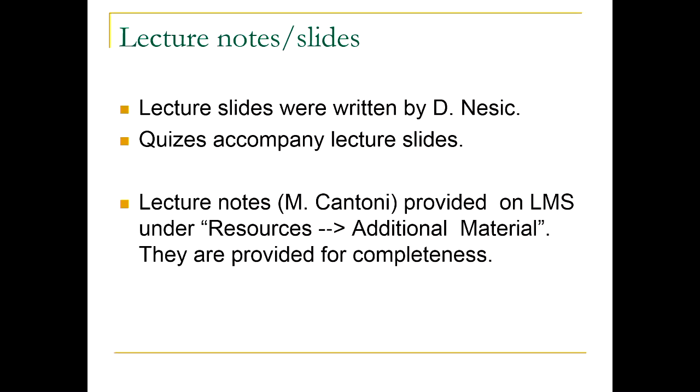Often students say we didn't get enough feedback. Well, I spent 1 semester generating these questions to help you get feedback straight away on how you understand the lecture material. There are also lecture notes which basically cover the same material. They may have a bit more detail at times, and they're provided for completeness. But as I said, I'm following the lecture slides that I generated.

I will teach you about disturbances and perturbations. So this was a disturbance in my lecture, and I handled it well. I'm robust.

All right, so there are other texts. Franklin's book and Ogata's book are classics. And why I emphasize these books is because they have a lot of solved examples. Students often ask me, can you give us heaps of solved examples? These books have them, and you would have a lot of copies in the library. So Ogata would have a lot of solved questions after each chapter, and then a lot of unsolved questions. So it's a good balance between learning how to solve questions by following solved examples, and then attempting those unsolved questions by yourself.

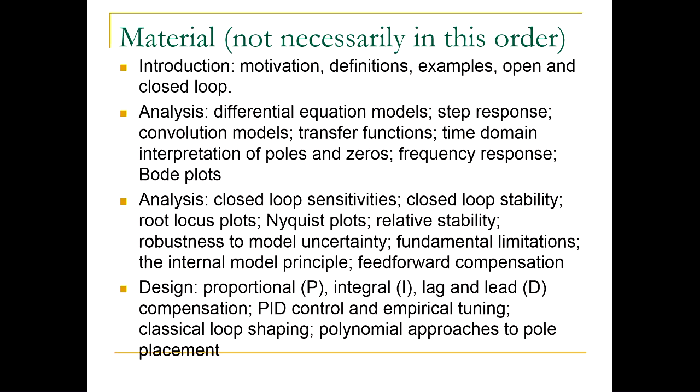Workshops. Workshops are in EDS 8. You can assign yourself, you probably already did, to one of the groups. You would work in groups of 3. There will be some reports for some of the workshops. So first couple of workshops, there are no reports, but then the last 2 do have reports. You would work in groups, and more instructions will be given by the tutors.

All workshops will start in week 3, except for workshops that are on Friday. Why is that? Does anyone know? Yeah, grand final. So footy grand final is on one of the Fridays in September, last week, I think, in September. And these people will start in week 2, so next week. So Friday workshop starts next week. And all others week after that.

Head tutor is Jing Mo. Please contact her for all things to do with workshops. If you need to change times, if you know there are any issues, you're sick, please contact Jing. She would be dealing with these sort of questions. If you contact me, I will just forward your email to her. You can save me just one press of a button by just contacting her directly. And she would contact me for any issues that require perhaps more sort of executive decisions, right? But she's the first point of contact.

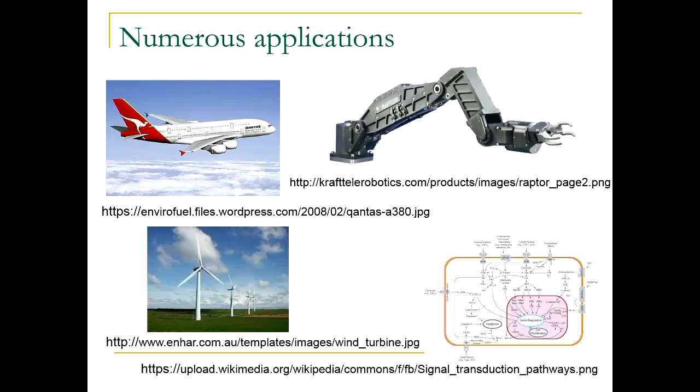So I will present an example with some terminology. One purpose of this subject is to teach you the language of control engineering. Obviously, we want to also equip you with tools, but the language is also important. So I will introduce some of the language in this lecture. And the block diagram is an important part of our dictionary in control engineering, so I will introduce block diagrams, and then wrap up with conclusions.

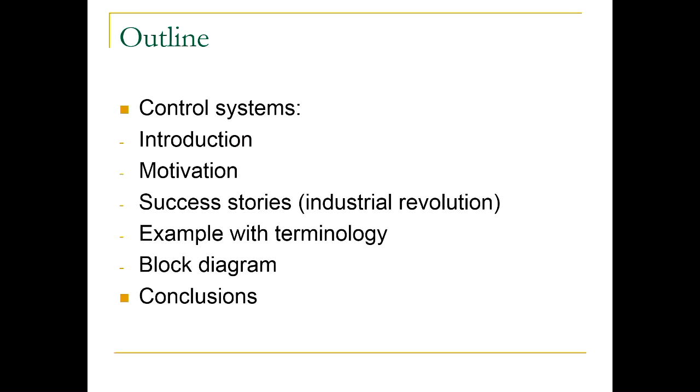All right, so my claim is perhaps that we are a dominant species because we learned to control our environment. And this has been going on much longer than you may think. For instance, I was reading a book about the history of humankind, Sapiens. I don't know whether you've heard about the book. It's a maybe not flattering summary of the effects of humans on nature, starting from the Stone Age.

As people spread, if you believe the theory that they spread from Africa, wherever they came to new lands, big mammals disappeared within 1,000 years. Apparently, in Australia, all megafauna died within a couple of thousand years after human arrival. Eucalyptus forests apparently were not dominant until humans arrived, because they were burning the bush. It was better for them. They get food, they can move around. So they were actually controlling their environment already with the advent of fire.

So fire has multiple uses. You can start eating foods that otherwise you couldn't. Cooking, right? Warmth. You control predators; you defend yourself from predators. Clothes: you can't imagine people conquering the North Pole and Canada without clothes, right? Building cities, etc. We live in a very regulated, controlled society.

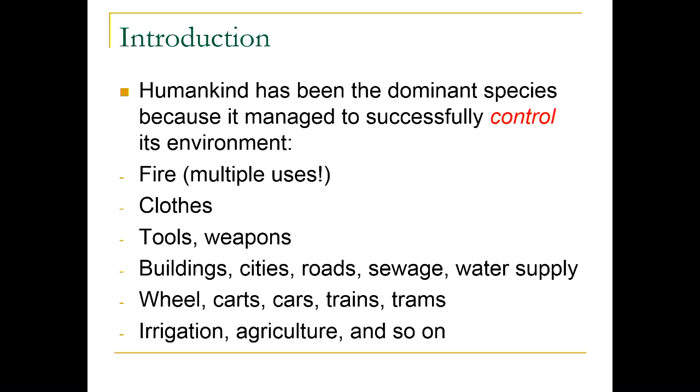And it shouldn't come as a surprise to you that control engineering plays a crucial role in any technological advance. In agriculture, infrastructure of any sort, buildings, household appliances, transport, defense, any device you can think of would have some sort of control in it.

So in order to really talk about control systems, it's a useful thing to reflect on what we mean by a system. You can think of a system as a bunch of things, right, that work together. Actually, anything is a system. We talk about the solar system. Share market is a system, economic system. We talk about social networks.

Control scientists these days analyze interactions on social networks, and they try to maybe look at advertising. What works, what doesn't. But they develop and analyze mathematical models of how humans behave in a network situation. So there are things called consensus. When do people reach consensus, right? In terms of their opinions, etc. So notion of a system is a very broad notion. Pretty much anything, a single cell can be a system, a solar system, galaxy, you know, anything really is a system.

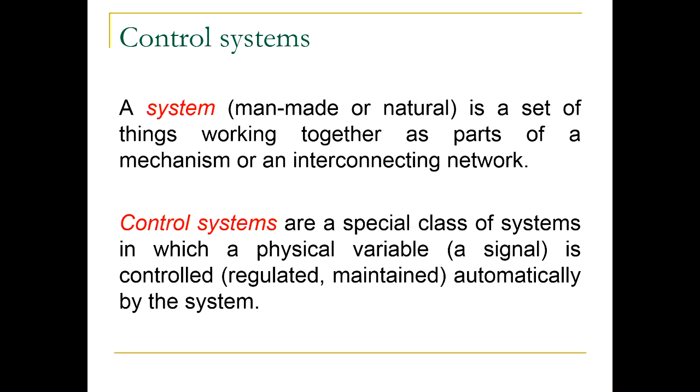Now, control systems are a special class of systems in which we want to control a certain physical variable. What physical variable we're talking about, that depends on the application. It can be motion in a robot or a car. It can be temperature in a room. It can be anything, really. When you are taking a photo, there is a zoom. There's a control mechanism there, right? To adjust the zoom so that you get a clear photo, etc. So we will talk in this subject predominantly about control systems.

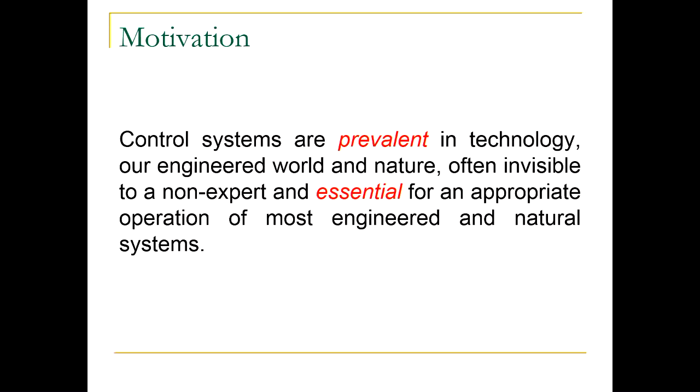Right? So when you get diabetes, that's basically your control system for regulation of blood glucose in your blood, and it's not working. And that's dangerous to your health. Cancer is basically uncontrolled growth of cells. The cells just go crazy and start growing, and we still don't know how to find a stop button, right? That's where all the cancer research is sort of concentrating. So anyway, these control systems are prevalent and essential.

Let's look at prevalence. So I listed here just a small subset of applications of control systems. And you can see here that it pretty much touches upon any area of your life. You might be eating food that was produced in controlled environments. I had for a few years a person who works in mushroom industry, not funny mushrooms, just mushrooms. And this turns out to be a very complicated control system because you want to maintain the right environment for mushrooms to grow. You want to have as good harvest as possible, and that requires careful control of humidity, temperature, etc.

So this is just a subset of possible applications of control. These days, control has found its place in every area of science as well. In medical science, control engineers are looking at basically designing artificial pancreas. So there are sensors attached to your body that measure the blood glucose levels, and there is a device that can pump insulin into your blood, right? Some of them will have also glucose because when the blood sugar falls down, that's a dangerous thing. So some pumps actually have both insulin and glucose. And there is more and more evidence in the research literature that these devices are successful in clinical trials.

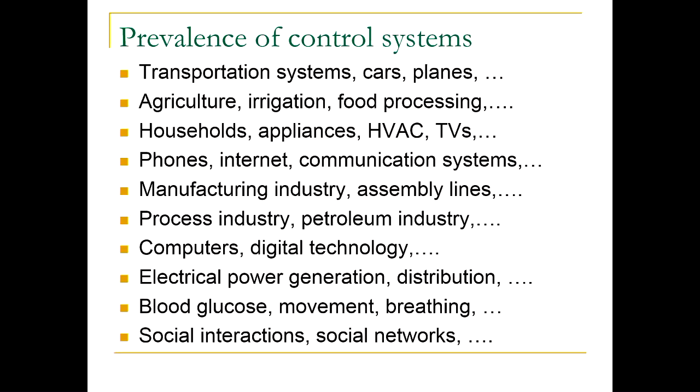So, look, you can find control engineering pretty much everywhere. Unfortunately, many people are unaware of its importance. So I hope at least that you would appreciate it more after doing this subject. Now, that was about prevalence. Prevalence means it's everywhere. How about its importance? Well, I said that it plays an essential role. Actually, I would say this is an enabling technology.

So someone designs a robot, and then a control engineer designs a control algorithm and makes that robot useful for something. Maybe in automotive industry, they are welding, they are painting cars, they're doing all sorts of useful things. But without a control algorithm, robot is absolutely useless, right? There are lots of examples where you can achieve high performance and precision by using control. Precision surgery is one example.

Right? There are lots of repetitive tasks that can be done in a controlled fashion. Assembly lines in the automotive industry have been around for a century, and there was a lot of automatic control that enabled mass production of cars. Control was essential in this case.

Reduce waste and emissions. There are more and more stringent regulations in terms of emissions in transport. So governments impose on car manufacturers certain rules. You can't pollute as much as you want. So that poses a challenge for control engineers to design control algorithms that will achieve these reduced pollutants. Also improved fuel and energy efficiency, especially when you do advanced control.

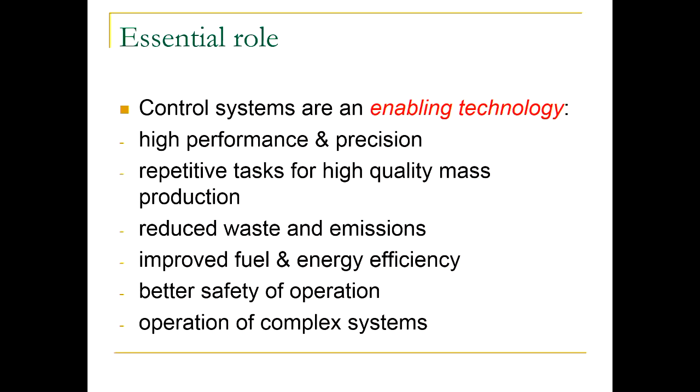By the way, the internet is one of the most complex man-made systems, very complex, and it works. You do get access to the internet. It's not that your next door neighbor only has exclusive access. There is an algorithm behind the internet that provides fair access to the resource. So that's again controlled. The brain is one of the most complicated natural systems, and there are a lot of control mechanisms within the brain that make us think, do, be creative, do all sorts of things.

All right, so I want to go now to a very specific success story. Do you know anything about the Industrial Revolution? Have you learned about it in school? Sometimes called the first Industrial Revolution. Does anyone know what it was? Why do we call it the Industrial Revolution? Because it changed the way our industries work. We had a lot of small, medium enterprises, but after the Industrial Revolution, we could mass produce things. Yes, we could. Mass production, that's a good one.

Do you know which area of industry was most affected? Oil. Sorry? Oil. I wouldn't go to oil. That was maybe the coal time. People were still burning coal at that time. It's textiles. You could really massively produce cloth. My grandmother had a loom, she made cloth from thread. You first shear a sheep, then you create thread from the wool, and then you can start making cloth. Now, with these automated looms, you could massively produce thread, and also cloth later on.

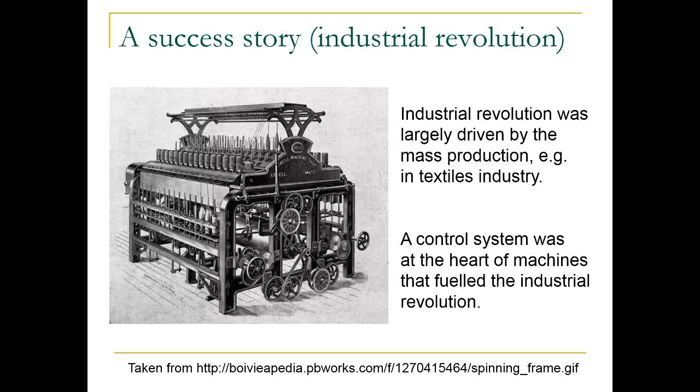So this is basically, look, these looms basically make thread out of wool, right? And you could have heaps of them spinning at the same time, and a control system was at the heart of this device. And this actually fueled the industrial revolution. Transport was another one. All the railroads started booming a bit later. But let's talk about the control system, because I'm interested to uncover for you this little control system that made all this happen.

All right, so how many of you have heard of Watt? Yeah. What was he famous for? Sorry? Well, you say steam engine, but actually the control mechanism behind the steam engine was the intellectual property that I think made it work. So how does a steam engine work?

You have a boiler full of water. You have a guy, I don't know whether you liked Western movies, Indians are running behind the train, guys shovelling more coal. So that creates heat. Heat converts water to steam under pressure. And then this pressure can be used to power a turbine. That's the idea, right? So basically, steam under pressure converts the thermal energy of coal into mechanical energy. A very cool thing when we realized that we can convert one type of energy into another.

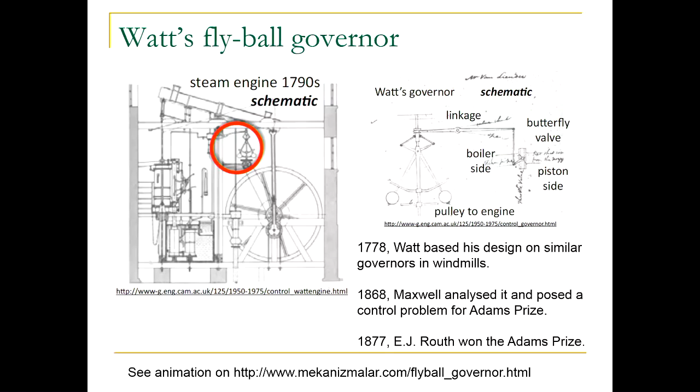Now, just prior to this success, people already knew the theory of flight, what they needed to do. But what was missing is control. The aircraft is inherently an unstable system. You turn off all the controls on the airplane and it just falls down. Right? You have to actively control it. It's an inherently unstable system. So without control, we wouldn't have the opportunity to travel so much, right?

And many more. There are many more success stories. So I encourage you to read some of these. All right. Now I want to move more into some abstractions and terminology. It turns out that describing systems in a very abstract form, using these so-called block diagrams, is a very powerful tool.

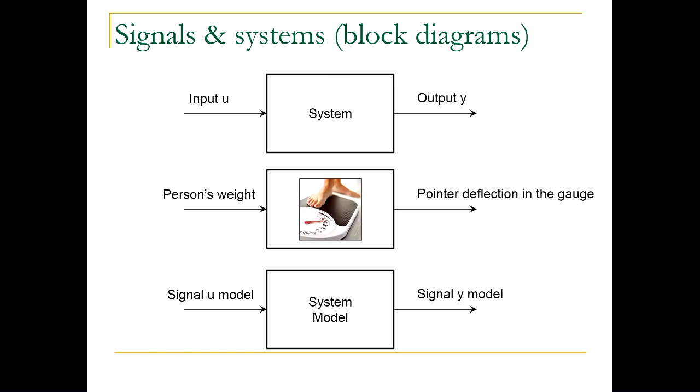Well, system model is a mathematical description of the dynamics of behavior of the system. So pretty much any dynamical behavior of a system is captured by your system model to some extent. We will talk about models in more detail, but at this stage I can just say we will look at differential equations, so-called transfer functions, or frequency response, Bode diagrams. So you will learn to model systems in different ways, and then you will use these different models for analysis and design of control systems.

Each of these tools is an important feather in your hat. As a control engineer, you need to learn a lot of tools, right? And then we will make them work. We will show you how to use these tools to solve all sorts of problems. We will always use model-based design and analysis, and models could be a differential equation, or a transfer function, or frequency response, or something else. In this subject, we will concentrate on these: differential equations, transfer functions, frequency response.

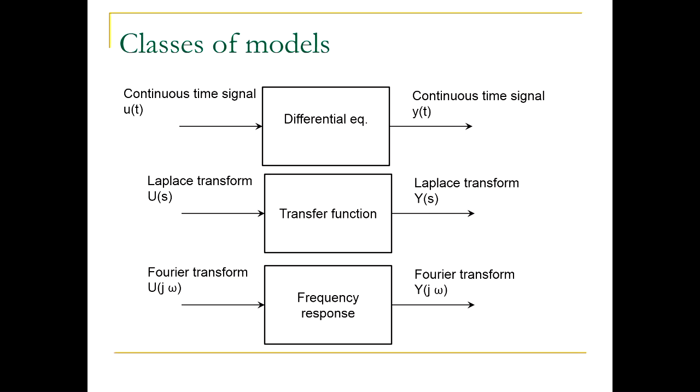All right, so we have a bit more time, so I just want to present one example you're more familiar with. It's winter, often you need to turn on heating when you come home, and we want to analyze in more detail what's inside this closed loop system, like the room temperature control. So what's presented here, we have a room. Here we have a door that's open, so we have a heat sink.

You know, if you go to Europe and you keep a window open, many people would just go and close it straight away. It's freezing outside in winter, right? Here we can still cope.

But anyway, which parts do we have in the room temperature control? Well, here we have a sensor that measures true temperature in the room. What is this? What does this thing do? Yeah, desired temperature. We set here desired temperature. You come home, you say, oh, I want 25 or whatever, 18 degrees in my room. You have to tell your system what you want from it, right? But then you also need to measure something. In this case, we can measure the true temperature.

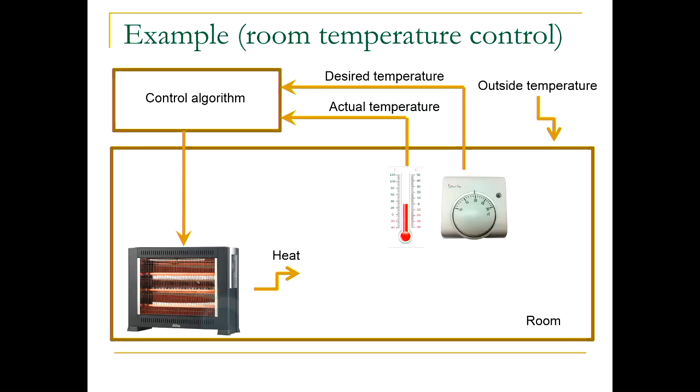The dynamics here is something that you need to carefully design. And that's what you guys would learn to do. You would learn to design this control algorithm, take the model of the actuator, room, sensor, etc., and then you would design the brain. The control algorithm is the brain of the system. So you will learn how to design that.

Just a few terms. I would call a room a plant. Anything you want to control is a plant. A car, if you want to control a car, is a plant. In this case, room is a plant. Right? Sensor, thermometer, is a measurement device. So basically, whatever measures something, we will call them sensors. Actuator, in this case, is a heater. That's a device that can actually affect the dynamics, the behavior of your plant.

Right? In a car, what would be an actuator? The engine, yeah. Steering wheel, right? Brakes, they're all actuators. You can affect them, right? So there are all these actuators in a car. Now, output variable is a variable that we want to control. In this case, the true temperature in the room is the output.

The disturbance, in this case, is a variable you can't control, but it still affects your system. So for instance, in a car, cruise control example, the slope of the road is a disturbance. If you drive on a flat road, it's different from when you're driving up a mountain. So you need to press the accelerator a bit harder to maintain the speed, right?

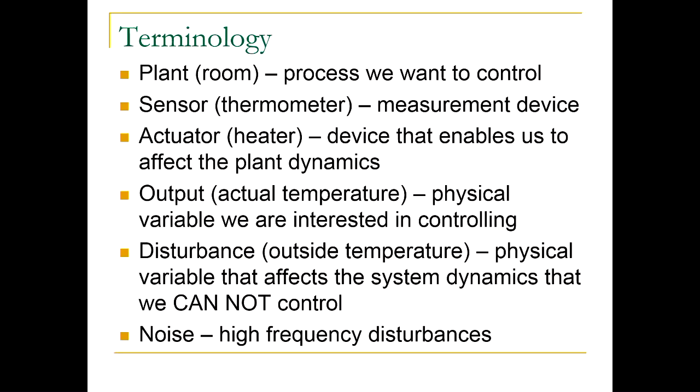And also, what we will often use is the term noise. That is basically some sort of small amplitude, high frequency signal that doesn't allow you to get the true reading of your sensors. If it's a digital sensor, you might find that the measurement really oscillates. It never gets the true temperature, but it's affected by this so-called noise. We will talk about this more later on in the subject.

So it turns out that using these boxes and arrows, you can represent the room temperature control using a block diagram that looks like this. So you have a controller. This controller takes desired output. What was the desired output in the room temperature example? Desired temperature, right? Then this is the plant, that's your room. This is your heater, right? This is your sensor, in this case thermometer.

So the thermometer basically takes the measurement of the temperature from the plant, passes it to the controller. The controller also takes the information about desired temperature, and then if you design this thing carefully, it would work like magic. And you will learn how to design them carefully.

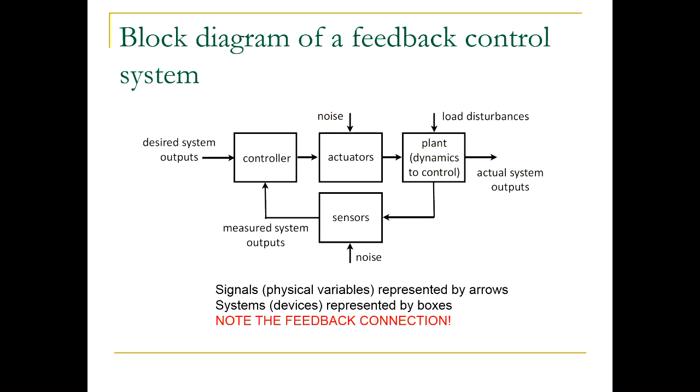What's really important in this figure is the so-called feedback loop. Note that the arrows here that represent signals are going in this direction, and then this arrow takes the measurement of temperature, passes to the sensor, the sensor passes it back. There is this circular loop inside this picture. That's called the feedback loop. Control systems that we will learn about in this subject rely heavily on these feedback mechanisms. And we will explain in the next lecture the importance of these feedback mechanisms.

All right, so I think I'm very happy with myself. It's just 1 minute before the end of the lecture. I paced myself very well.

So just what you should take out of this lecture. First, control systems are important, they are prevalent, they are everywhere. They are an enabling technology. Without them, you won't have many systems working.

Can you just keep quiet, please? Thank you.

Block diagrams are very important for abstractly modeling our system. It's a very simple model of our system. It shows mutual relationships between subsystems. And an essential feature of control systems is feedback, which we saw in the last example. We will see feedback over and over again. Feedback makes control robust, possible. That's why I give you feedback through midterm tests and quizzes, so that we have a stable learning system here. Questions?